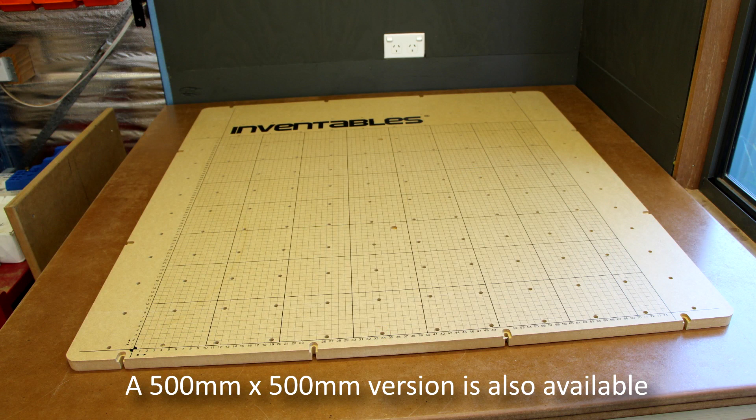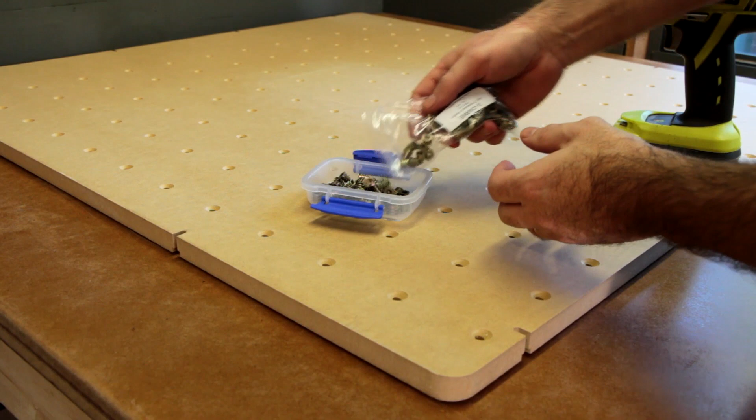So the first thing I tackled was the wasteboard. I've got the larger of the two machine sizes available, so this wasteboard is 1 metre by 1 metre. Now it comes pre-drilled and the holes are countersunk on the back, which saves me a lot of time. So I sort out the threaded inserts and I use my drill to run them in through the back of the wasteboard.

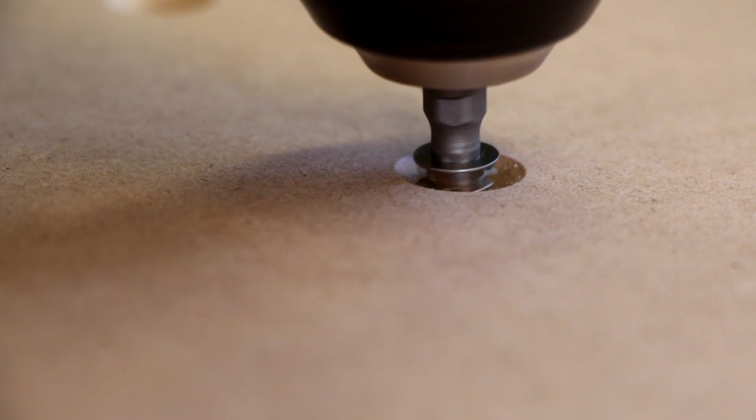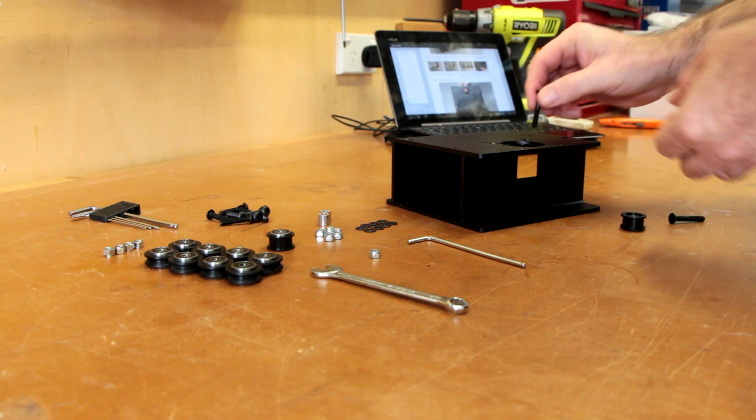I'm starting work on the X-carriage assembly first. The hardware is all bagged and Inventables have done a great job of labelling all the bags clearly. The website has detailed assembly instructions and videos, so between a combination of both of those, it makes putting the machine together pretty straightforward.

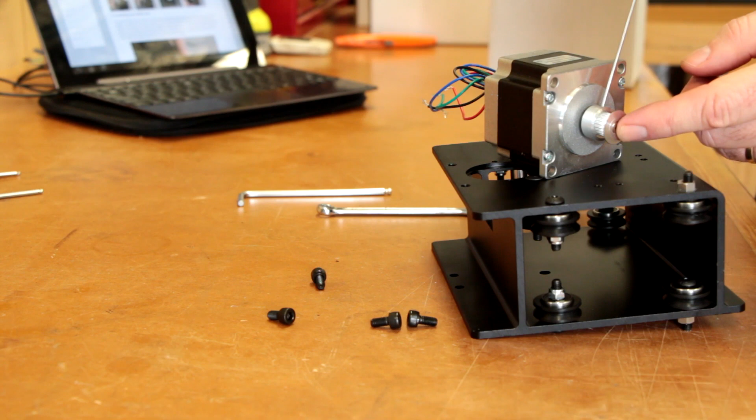So here I'm attaching a spacer and then the smooth idler wheel and tightening it all up. There's a couple of those go in and then we can insert the V-wheels. Again, being careful that we assemble each of the components in the correct order. Pretty soon we've got all of the wheels attached and we can screw the NEMA 23 stepper motor onto the back.

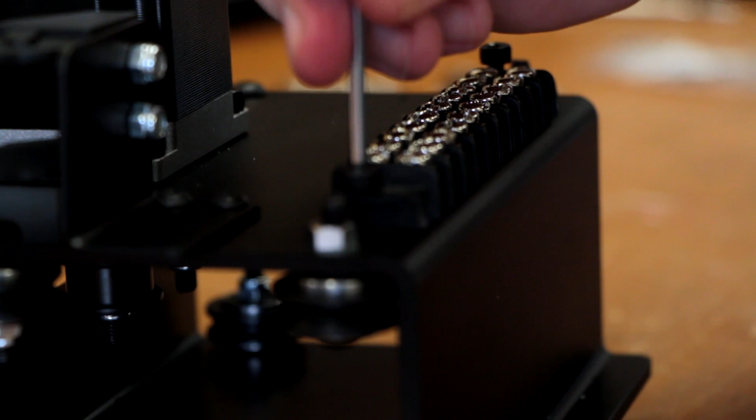A drag chain angle bracket gets attached and we also attach a terminal block. We'll use that later to wire the stepper motors up. So with the X-carriage assembly complete, we can start work on the Y plates. I'm scrolling through the assembly instructions and checking what hardware I need for this particular step and then just sorting it out ready to use.

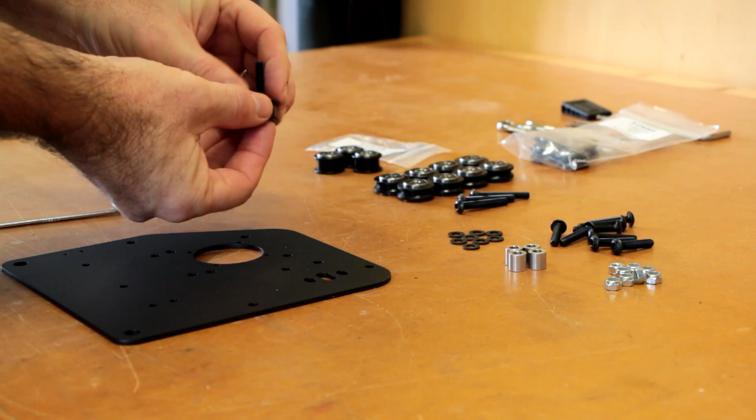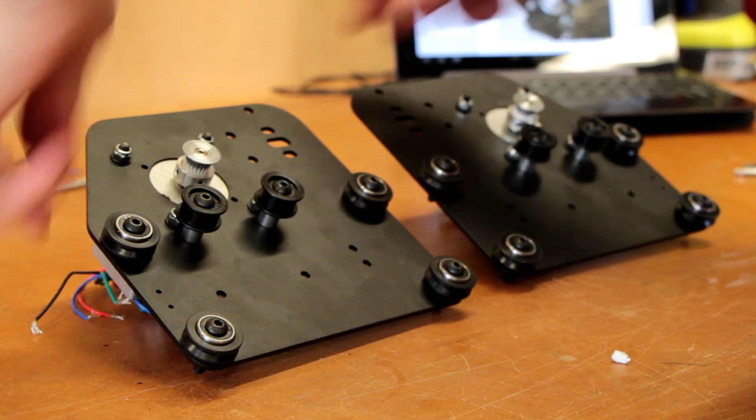Again, we're attaching smooth idler wheels and V-wheels to this assembly. There are a few holes on this plate, so you need to make sure that you're using the correct ones. And when you're finished, you should have two plates that are a mirror image of one another. Each of the Y plates has a NEMA 23 motor attached to the back.

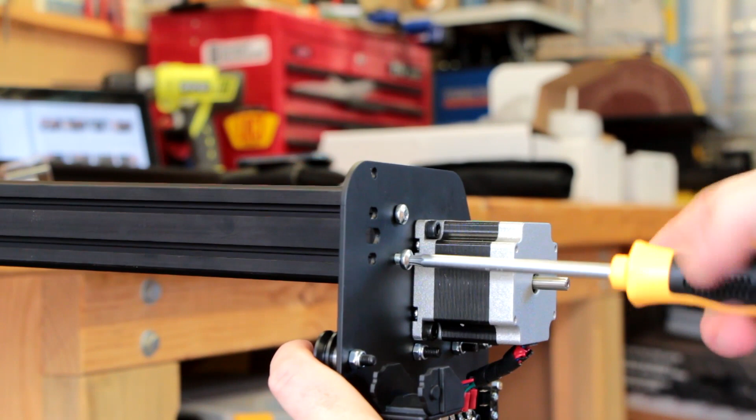Now here I'm assembling the gantry and it involves using self-tapping screws to tap the ends of the maker slide. Now a lot of people on the Inventables forum found this step to be cumbersome, but I found it pretty easy to be honest. I held the maker slide lightly in my bench vise and that freed up both hands so I could hold on to the assembly and tap it.

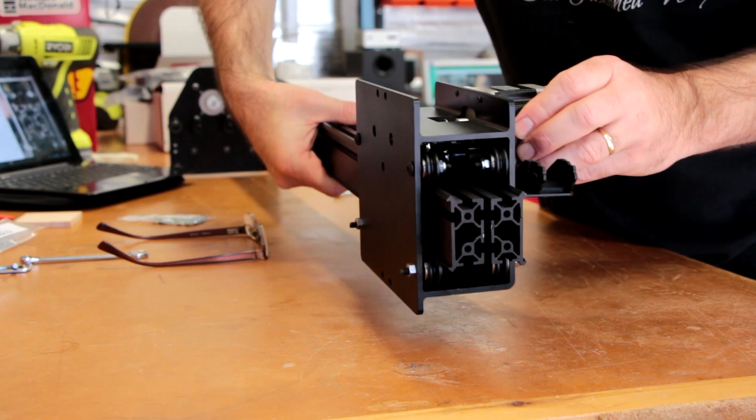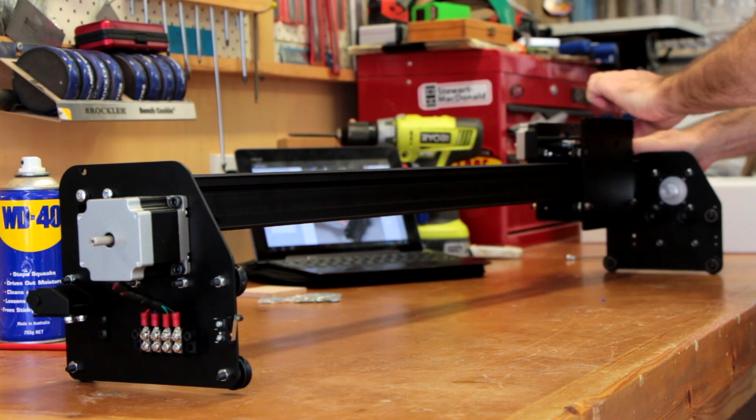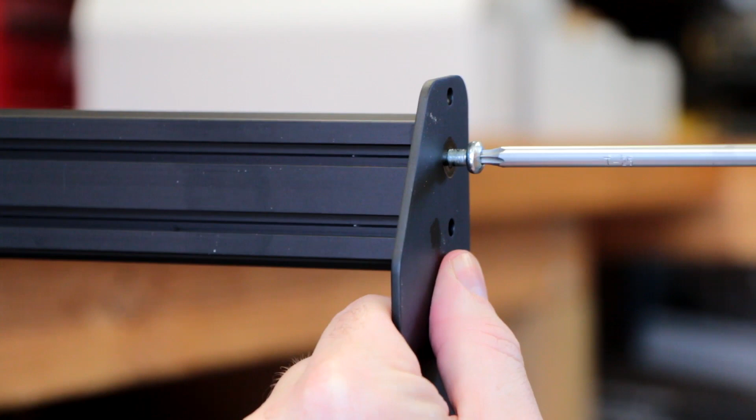With one of the Y plates screwed on, I could now slide in the X carriage that I assembled earlier and then finally attach the other Y plate. And then I just slid it forwards and backwards for half an hour, admiring my handiwork. The next step was to assemble the Y-axis, and I used the same technique as before, holding the maker slide in a vise while I tap the ends with the screws.

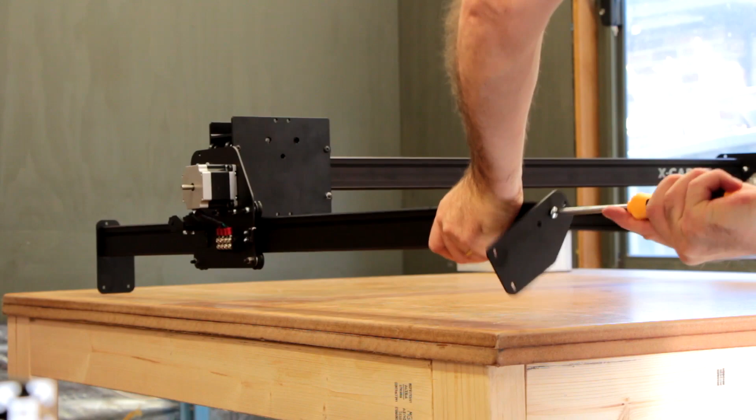So it's starting to take shape now. I can slide the gantry onto the Y-axis and then attach and tap the ends. And here I'm just dabbing on some WD-40. It was a tip in one of the Inventables videos, so I gave it a shot and I think it helped.

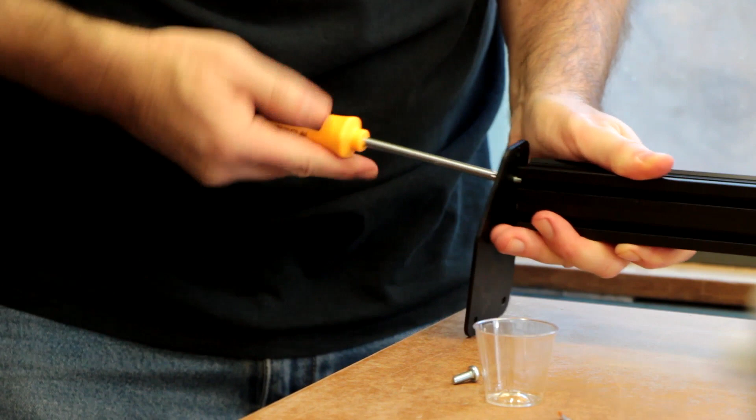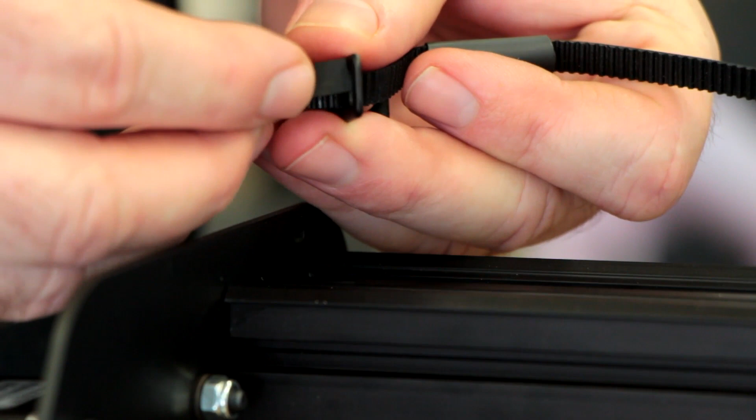And this is the GT2 belting and it's used to move the machine around. It just slides in over the top of the pulley wheel and under the smooth idler wheels. One end is fed into a bracket and then over on itself. I'm using some heat shrink tubing to make sure the teeth mesh in and catch properly so the belt doesn't slip.

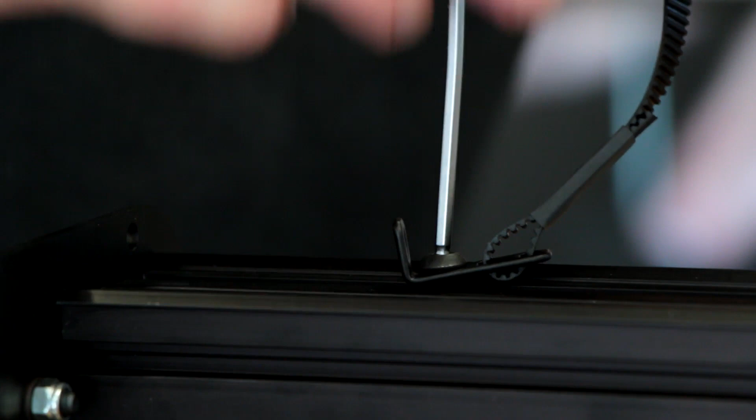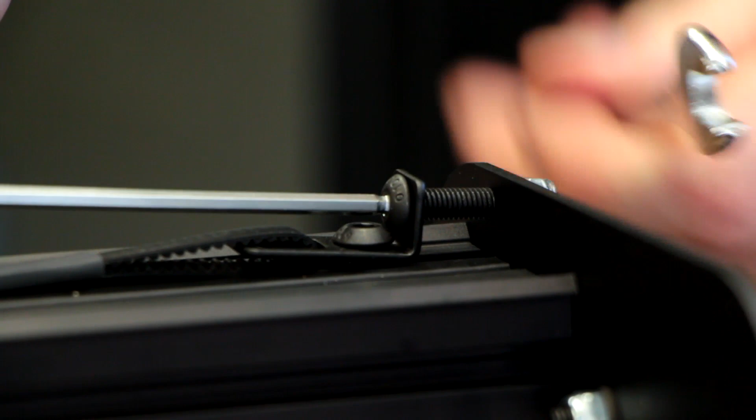A button head cap screw allows me to position it right at the end of the maker slide and lock it in place. And it's the same process on the other end as well, except the addition of an adjustment screw and nut, which allows us to tension up the belt later. And then we just repeat the process on both Y-axes.

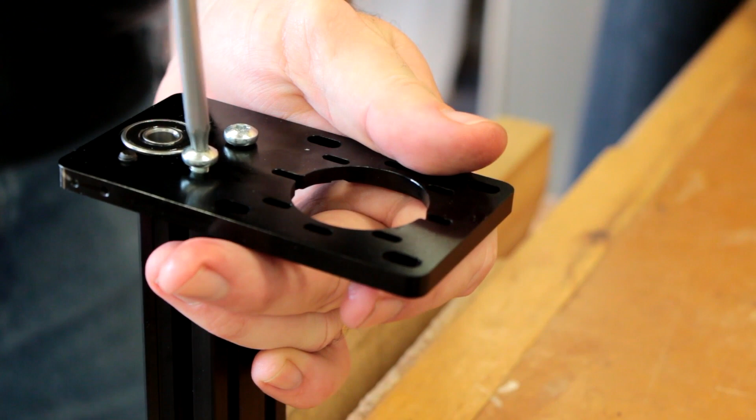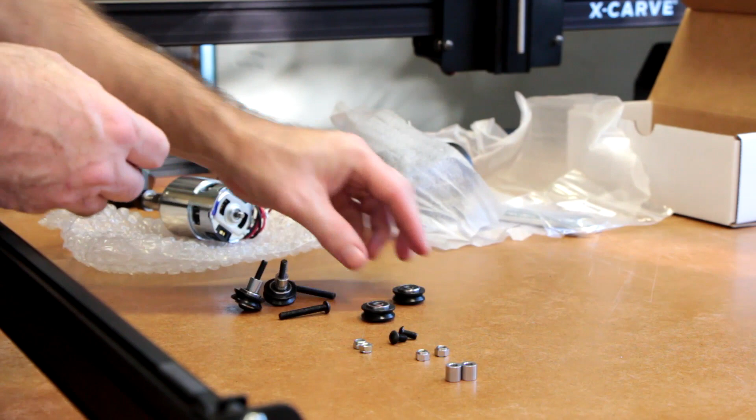This is the last of the tapping that needs to be done. Here I'm attaching the Z-axis motor plate to the maker slide. A NEMA 23 motor and belt are attached and then tensioned up. This is the spindle carriage. Again, just more V-wheels and idler wheels. Once that's assembled, it can be slid into place and the spindle can be fitted in and tightened down.

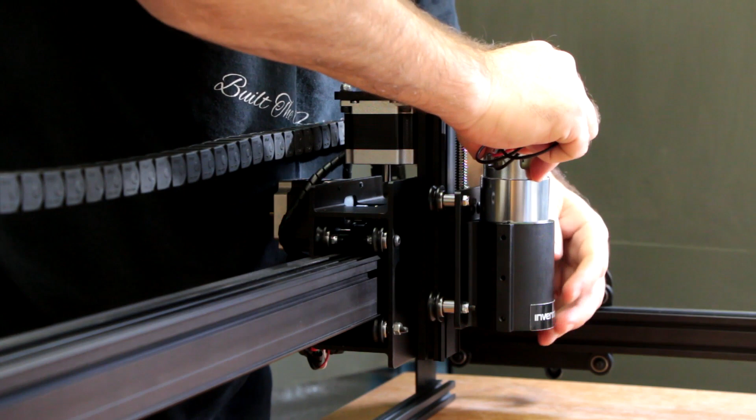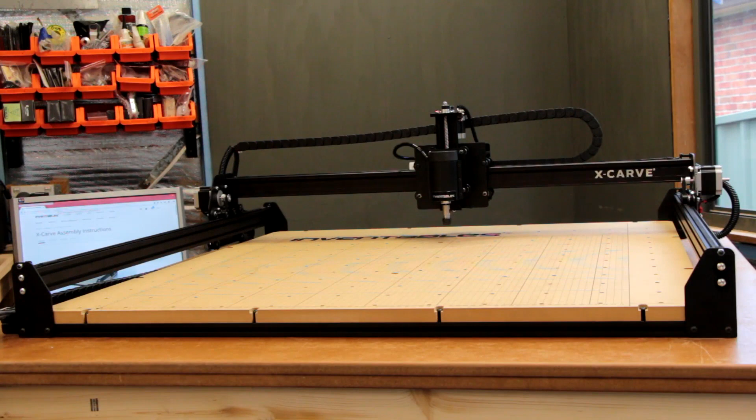So at this point it's looking pretty complete. The wasteboard is in place and I've got the drag chains attached and the wiring is routed from all the stepper motors to the front left corner of the machine. I've tidied up the wiring as much as I can with various sizes of sleeving, and I've used crimp connectors on all the stepper motor wires.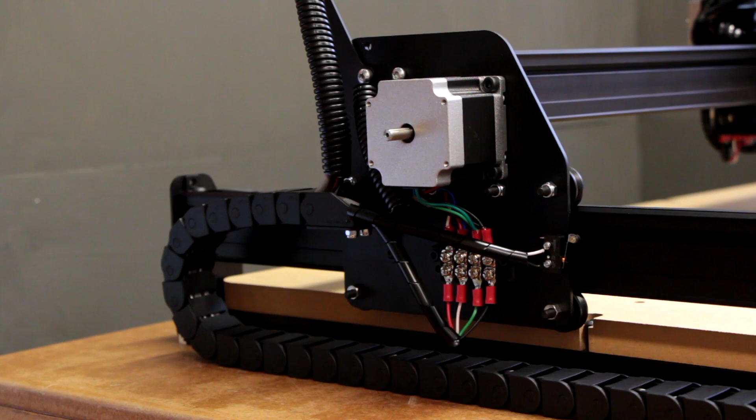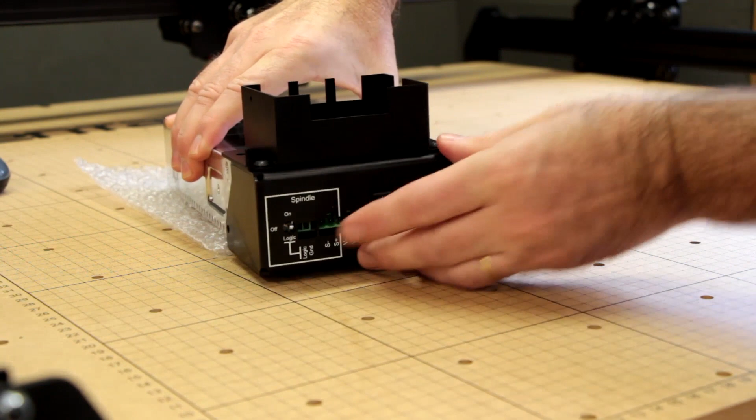So the final step is to assemble the electronics. Here's the 400 watt power supply and the faceplate. There's a small interface PCB that attaches to the power supply. We just need to back out some of the screws, slot the PCB in place and screw it down. The faceplate slides over the front and tidies everything up. It's secured with a couple of screws on the side.

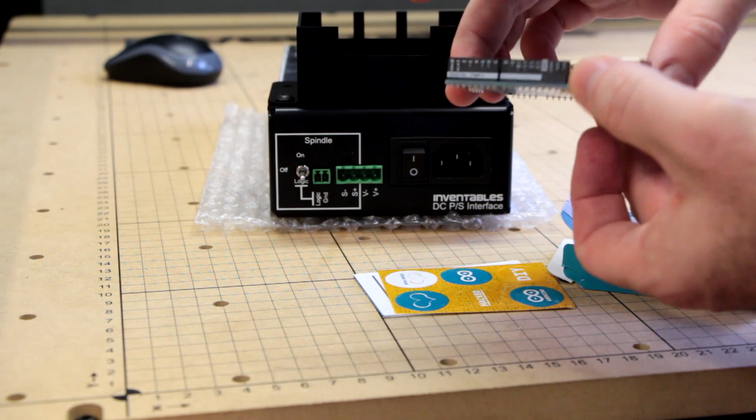There are two PCBs that are mounted into the enclosure. This is the Arduino board and there's also a G-Shield board as well. The Arduino gets screwed down into place first and then the G-Shield is pushed down on top. The assembly is finished off with a fan enclosure that screws onto the top of everything. And at this point it's time to fire everything up and make sure it's working. And that blue light is exactly what we want to see.

So the next step is to head over to the Inventables website and launch the Easel app. We need to sign into the website. Easel opens and now I can set up the X-Carve and make sure it's communicating with the PC. Now I can confirm the size of the machine I've got, which is 1000 by 1000, and the lead screw type I have is Acme.

And then I need to select the COM port that the Arduino is connected to, which in my case is COM port 3. And now I can test to make sure that my stepper motors are wired correctly and that everything is moving in the correct direction. I can use these buttons to jog the machine along all three axes. So everything's looking good, so I can click yes to everything. Now you can choose to have the spindle controlled automatically by Easel, so we'll select automatic and we can test that. Now that's looking good.

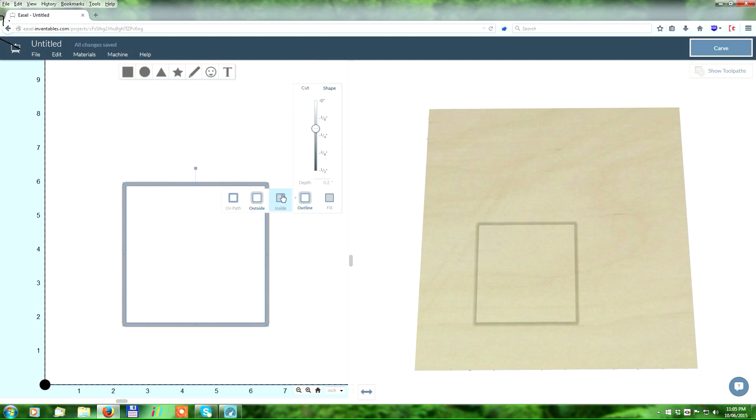Right, now we can actually design something and make our first cut. So this is the interface for Easel. And you've got all of your basic geometric shapes up here. Just shift that into the middle. We can enlarge that a little bit. This pop-out menu is our toolpath generator. So we can actually cut on path. You can cut outside if you just want to cut the square out. You can cut inside, of course, and you can also fill, which will remove all of the material.

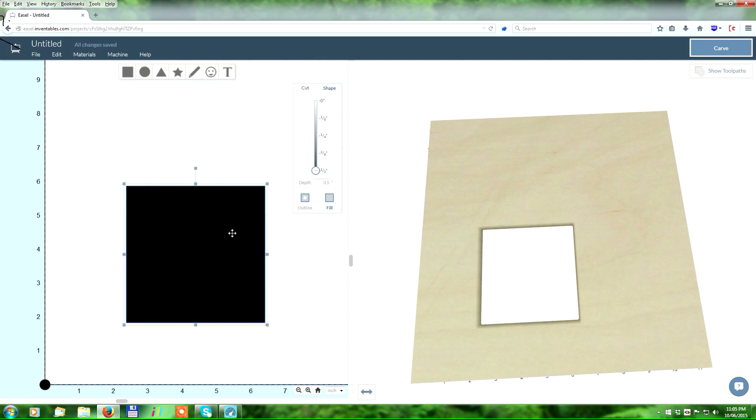Our depth of cut is controlled by this slider, so if I slide that all the way down, you can see over here in the 3D preview that we've got a representation of what we've just done. We can cut all the way through the wood there, so that works pretty well. You've actually got a bunch of fonts that you can import, and you can do exactly the same thing with those.

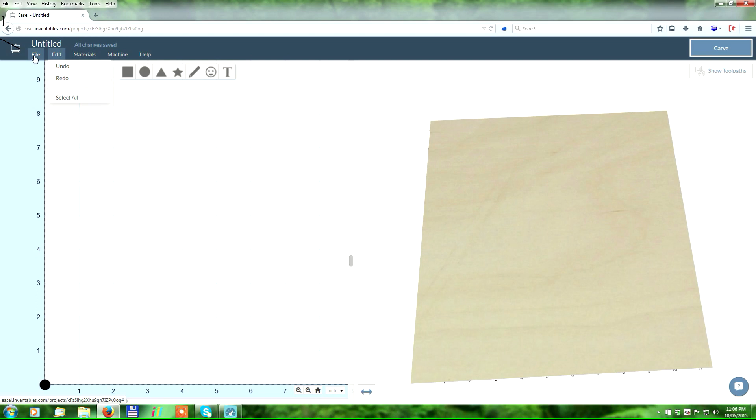Now, the beauty of this program is it imports vector files, SVG files that you generate in Inkscape or Adobe Illustrator. So you can import an SVG quite easily. Just grab this one here, bring that in, just shift it over. Now, if we wanted to cut that out and make some templates, we would cut on the outside like so. Make sure the depth of cut is all the way through, and you can see we're cutting all the way

through over here. Now, the beauty of sliding this all the way through, so you're cutting completely through the wood, is it adds in tabs. You can untick that, of course, but you're better off having the tabs there so the parts don't come flying loose when you finish the cut.

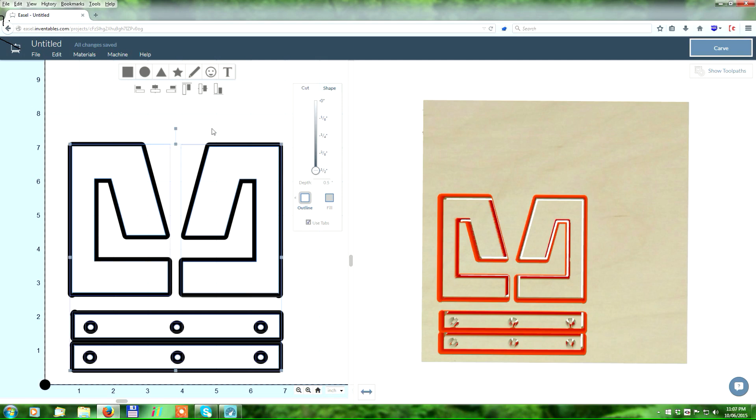Now, if you do your artwork in Inkscape, you've actually got a free software path from drawing your part right through to carving it on the CNC. Inkscape is free, Easel's free, so it's a pretty good deal. We'll just get rid of that, and I've got some artwork that I've done up in Adobe Illustrator. It's a little sign that we're going to carve.

Just grab that and move that over a little bit. You can adjust each of these letters individually. We might just skew that on its side a little bit, and we'll do the same with this C. For no reason at all, we'll just enlarge that A. So that looks pretty good.

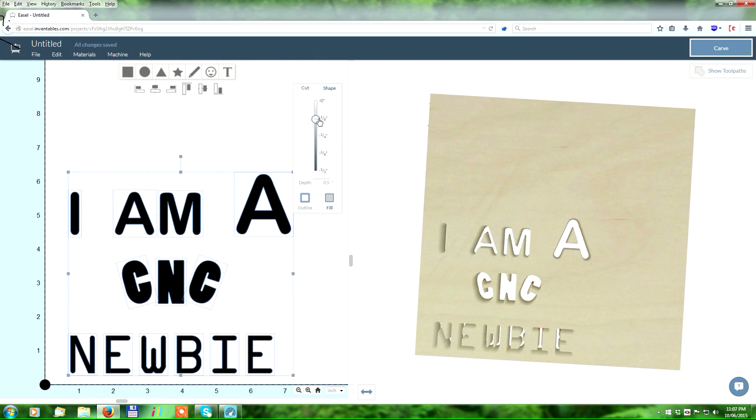In fact, we're cutting all the way through the wood at the moment, which is not what I'm after. I just want to engrave that down 1/8 of an inch. So we can use the slider here, or if we want to be exact, we can just go 0.125 and we're done. I've got it set to fill, so it's actually going to carve all of the material away inside of those letters, and it's going to carve down 1/8 of an inch. So once I'm happy with that, I just hit the carve button and that will generate all the toolpaths.

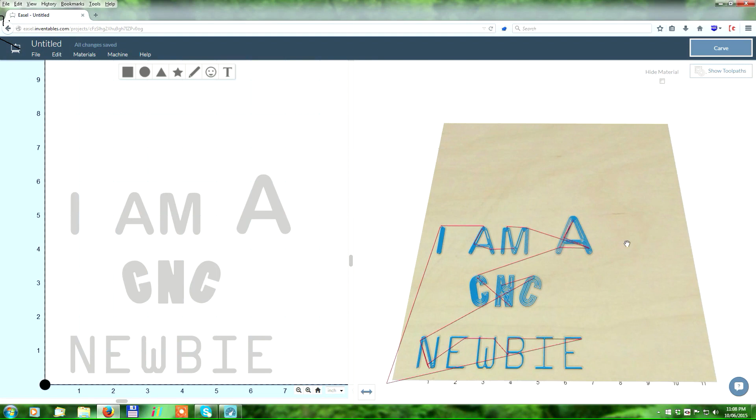In fact, I'll show you the toolpaths. If I click on show toolpaths, you can see over here the red is the router traveling to the various locations, and the blue is the actual cutting path of the bit. So that's pretty cool. You can hide the material if you choose to and just see the path, and just make sure that everything looks right before you send it. And that looks pretty good, so I think we're in good shape. We're ready to send this to the CNC and create our first piece of work.

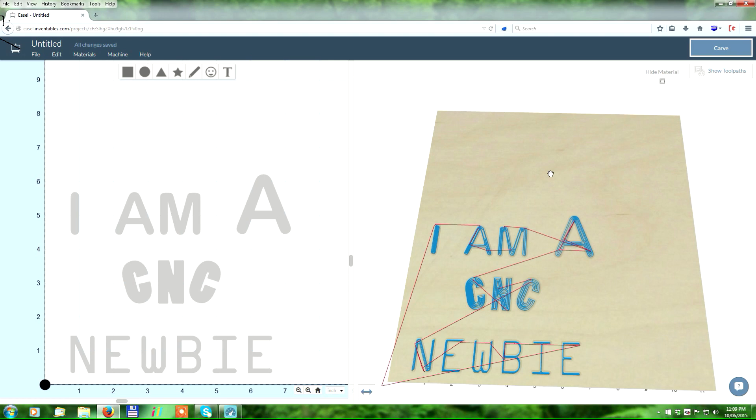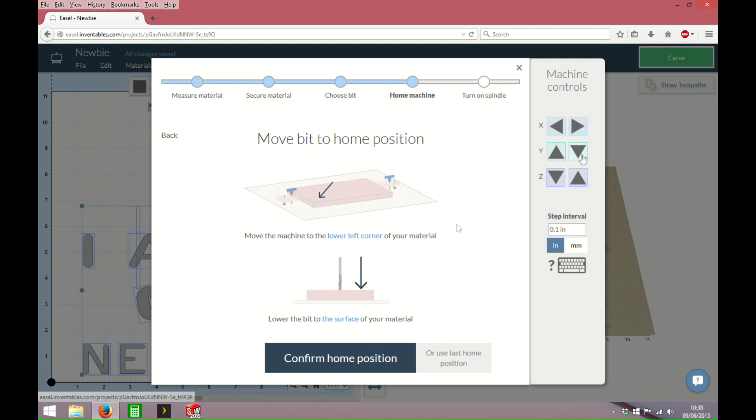Now, those 144 threaded inserts I screwed into the back of the wasteboard now come in handy. Now, I'm asked to select the thickness of the material I'm cutting, which in this case isn't important because I'm only engraving 1/8 of an inch into the top of it. I can confirm that. And it asks me to make sure I've got the material clamped down, which I have. And now I select the end mill, which in my case is going to be 1/8 of an inch. And now I just need to confirm the home position, which is where the machine will start carving from.

Now I can use this step interval here. I change it to 1 inch, and I can jog the machine closer to where I want. Now every time I hit the button, the machine advances 1 inch. And when I get closer, I just reduce the step interval down, and then I can jog closer to the top of the MDF.

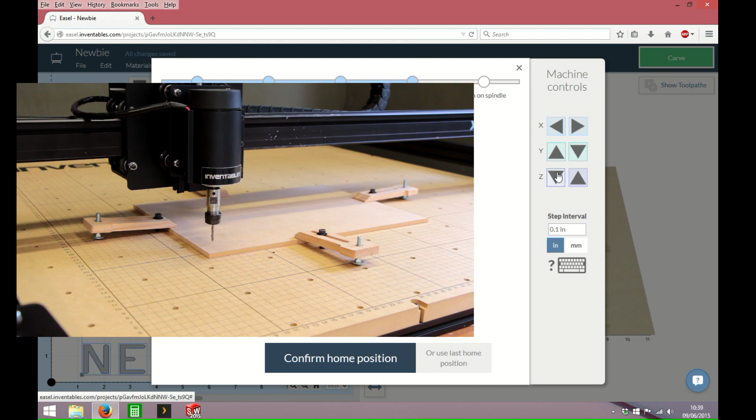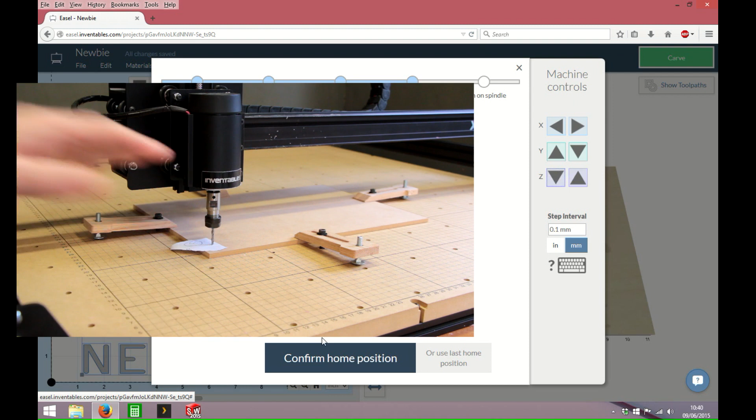I change it over to millimetres, and now I'm only jogging down 1/10 of a millimetre at a time. I want to zero that bit out on top of the MDF, so I'm using a piece of paper as a gauge, and once the bit is so low that it traps the paper, I can confirm the home position. The software automatically raises the bit and the spindle starts for me, and away we go.

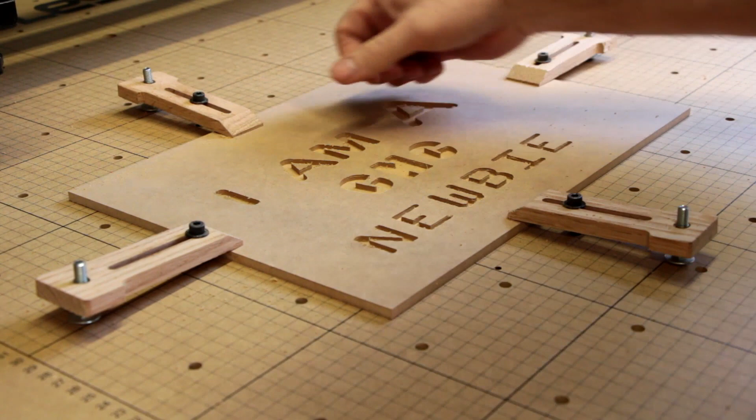So the end result was pretty impressive. A little bit of fuzz on the top of the MDF, but that was caused by the upcut spiral end mill that I was using, so that was easily cleaned up with a little bit of sandpaper.

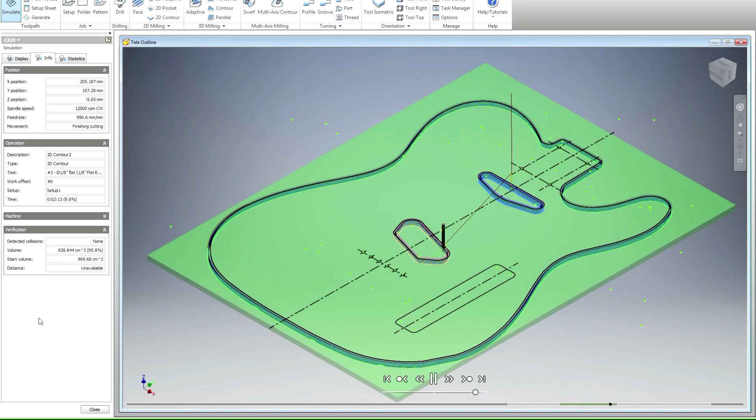So cutting the sign was fun, but I wanted to get a little bit more serious and actually cut a guitar template. So what you're seeing now is just a CAD file of a Telecaster body and a tool path I generated. I'm just checking the simulation to make sure there's no obvious problems before I cut it for real. So I'm new to all of this stuff, so the feeds and speeds are all a work in progress, as are the tool paths I generated. So I was pretty happy with the simulation, it looked good to me, so we can try cutting it for real now.

Now one of the first things I need to get sorted out is a dust shoe of some sort. Right now I'm following the spindle around with a vacuum, which was fun for the first 5 minutes, but it grew pretty tedious pretty quickly. So being able to just draw up the templates, step into the workshop and cut them is going to be pretty cool.

I'm taking it pretty easy on the spindle and just using a 1mm depth of cut per pass. I need to get a feel for how much I can cut per pass and not bog the spindle down. I see there's more powerful spindles available, so that's probably going to be my first upgrade, I think. This one's fine for cutting MDF and soft woods, but I wouldn't want to be cutting through 1.5 inches of rock maple with it.

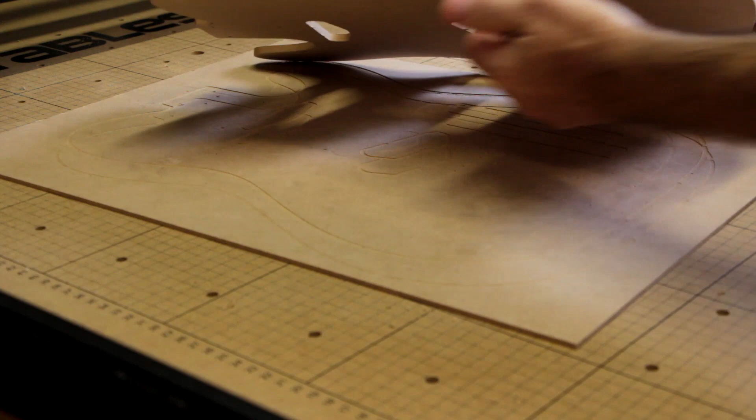So my tabs are a work in progress. I need to make them a little higher. The bridge route stayed put, but the other two popped out when I was cutting them. The edges look nice and smooth. So this is what is left from the tabs that I left in there, and they're easily removed with a couple of strokes from a file. The tabs are only 1mm thick.

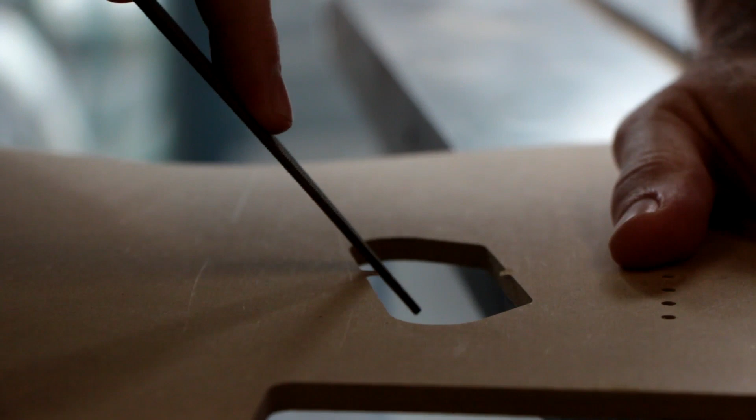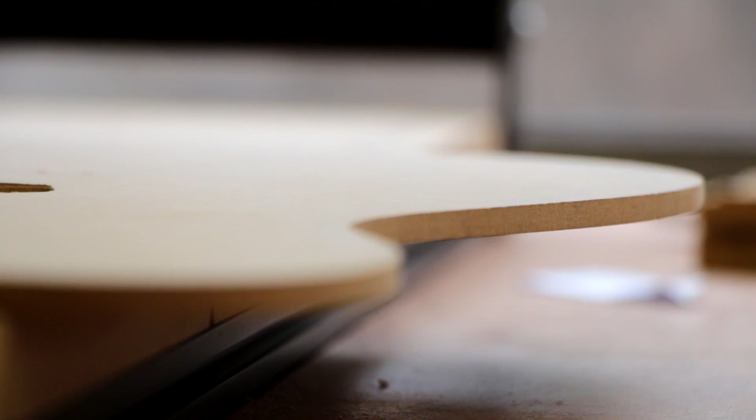And here's the end result, a beautifully cut template. Now as a test, I've only cut it onto 1/4 inch MDF, which is really too thin for a template. I need to cut them next time on 1/2 inch or 3/4 inch MDF.